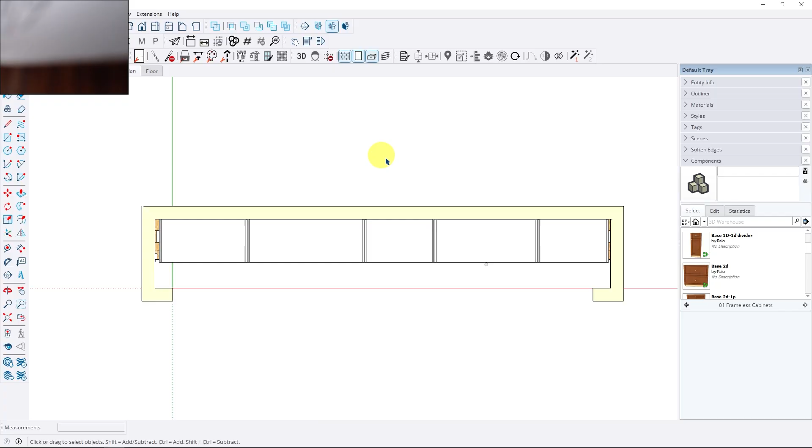After measuring, I determined the amount of space needed for hanging both long and short clothing, shoe storage, shelving, and drawers. I then did a concept sketch with rough measurements. As a complete rookie, I needed help.

Michael Samarza of West Oak Studios helped me install, set up, and use Cabinet Sense. Michael was awesome. What's super cool about his process is the access you gain to his extensive knowledge of cabinet making and his pre-made library of cabinetry components and hardware.

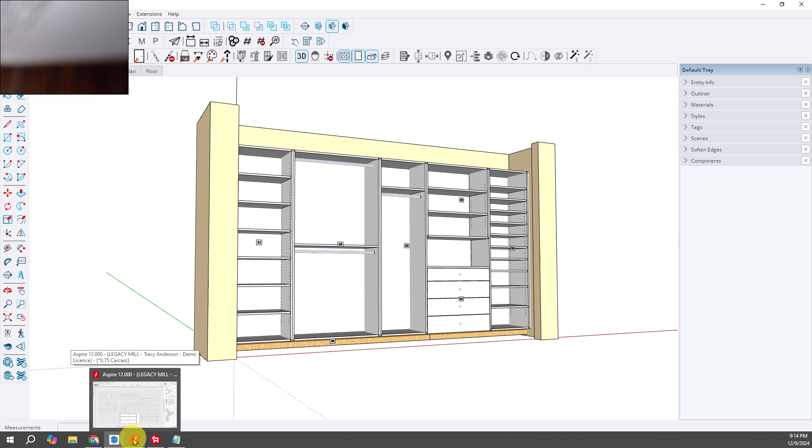I loved the printable sheet processing pages with each part clearly labeled with the name and edge banding location. What I found helpful was a list of tools with their corresponding station numbers listed at the top of the G-code. It was another way to make sure my machine setup was correct.

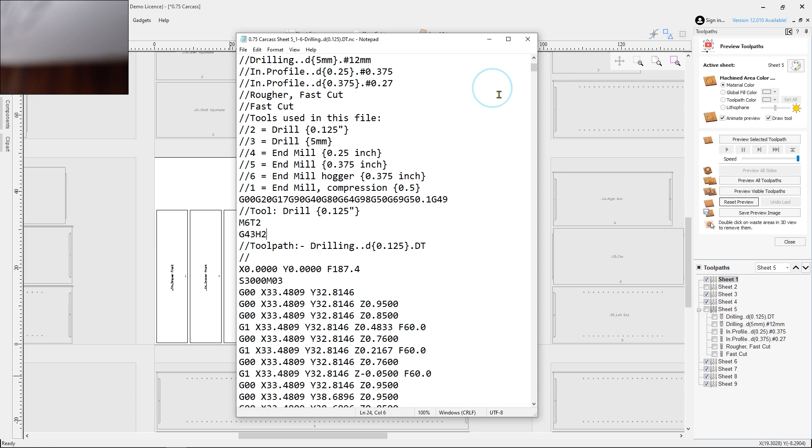I chose to use a darker melamine. I purchased the 3/4 and 1/4 inch sheets from a local supplier with matching edge banding. All cutters were purchased from Magnate.

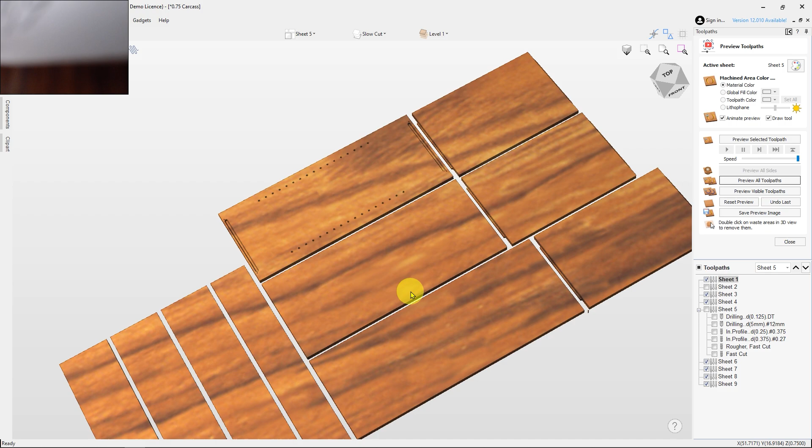I knew it was important to use the proper feeds and speeds. Michael had already programmed that information into the toolpath templates used in Aspire. Wow, talk about making my life easier. I used the sheet processing sheets to identify and mark each part as they came off the CNC.

Well, we've just finished cutting all the project parts. And so in the next video, we're going to be putting together the cabinets and doing the assembly work, and we'll follow that with the final video of actually installing the project. Oh, we'll see you in the next video.